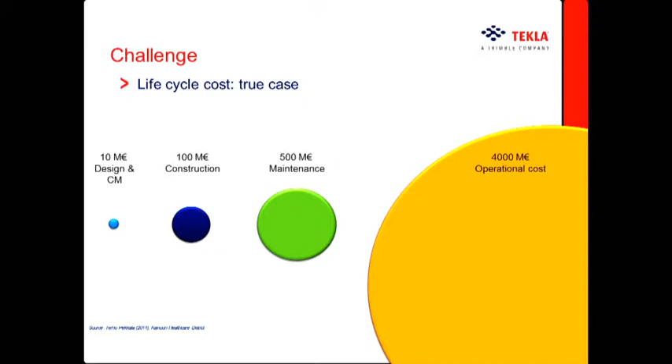And actually in this slide I have a true example from Finland. There was a new hospital project in Finland where 10 million euros was used for design and construction management, 100 million euros for construction, and 4,000 million euros for the operational cost was estimated for a 40-year time period. So maybe the true life is not that radical than the theory was expecting. So that was the product side.

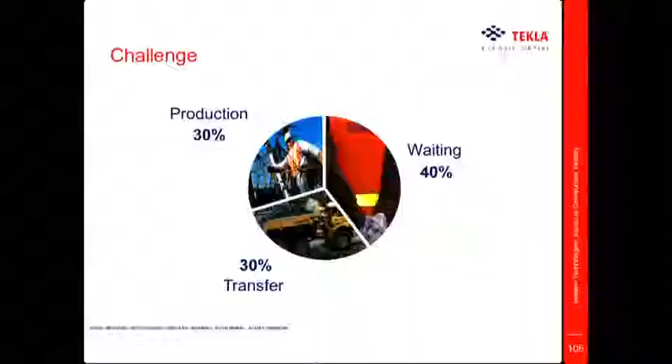Then if we go to the process. Generally, there's a challenge, and there was a research made by the Finnish Research Center and Skanska together, that on the construction side, only 30% of the time is actually used for production. The rest, 70%, is used for waiting or for transfer. Both of those can be called waste.

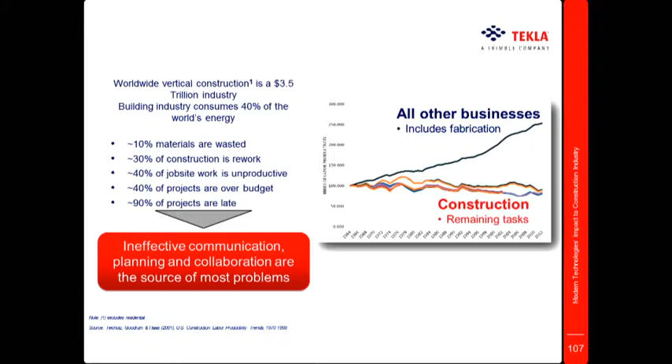Then this graph. In other businesses there has been a significant increase in productivity. This is other businesses, and this is the construction industry. But in the construction industry, as you can see, the productivity level has remained the same, or decreased a little bit. A small note, however: it's not totally true, I would say, because prefabrication that is done off-site is not included in this.

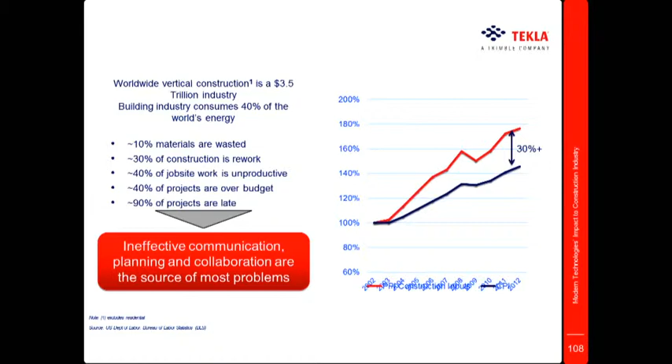But I think this graph is demonstrating the waste a little bit better. The red line is the product price index in the construction industry, and the blue line is the consumer product price. As you can see, there's a 30% difference. And where is the extra 30% coming from? It's ineffective communication, planning, and collaboration that are mostly the source of the problems.

So then about the solutions. BIM is the most potential paradigm at the moment that modern technology can provide. It can be seen as a solution to improve quality both on the product level and on the process level. BIM is an acronym which means Building Information Modeling, Model or Management, depending on the research you are reading.

But then what is BIM? At the moment, BIM is seen as a database that contains essential data and information that is required for construction processes. But I would say that BIM is much more than that.

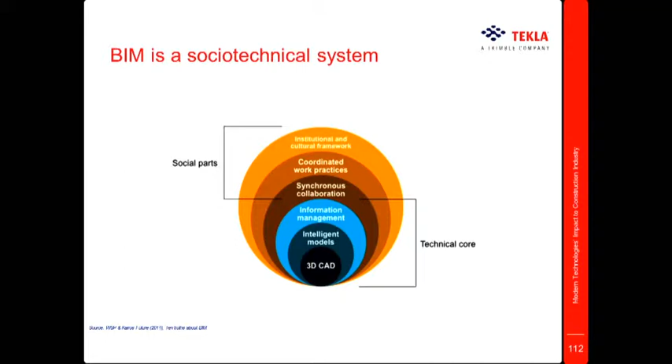So far I have only been presenting the technical core of BIM, which is actually only part of it. BIM is, let's say, a socio-technical system, which also includes the social part. This means that BIM is much more than just the technical core that is usually referenced—it is a combination of man-made technology and the social and institutional consequences of its implementation to society.

In Finland, Finland has been the leading country in implementation of BIM from the beginning. Now we are being challenged by the UK, which has set a target to be the leading BIM country by 2016. The UK strategy includes several things, for example cost savings over 30%, shortened delivery times, reduced emissions by 50%, and a significant increase in exports of 100%.

But although we are the world leaders in BIM, we have only been focused on creating the information, which means digital product models already exist at large scale on the market, but we are not taking any benefit from the information itself. So still, the most common way to communicate is through drawings, and only the design phases are using BIM and its benefits.

So then, how to use the information in the value chain? In the physical model phase, model information is being created at a constructible level. This means it includes, for example, rebars and embeds, and it's usually the engineering offices, engineering bureaus, who are doing that.

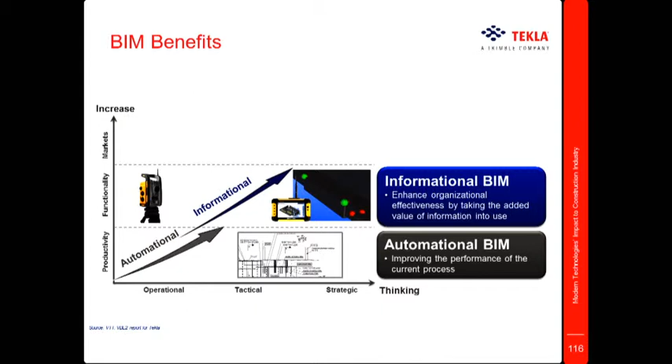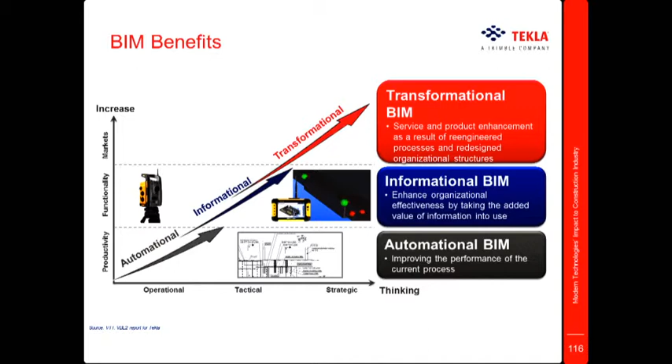For example, in the BIM model you have these kinds of layout points, which you can then use with the total station on the site to confirm that it's in the right place. There are already a few companies in Finland that have created totally new business processes and managed to question the existing processes in the construction industry.

So now for the cases. As a first case, I have Skanska. Skanska Finland has been investing a lot of effort into BIM as a contractor, especially focusing on the process side of quality. They have approximately 70 active BIM projects ongoing.

They use BIM at the site, for example for clash checking for visual examinations, quantity calculations, and so on. In recent years, Skanska has been focusing on mobile devices, with special focus on Tekla Field 3D. At the moment they have over 200 users on these kinds of tablets.

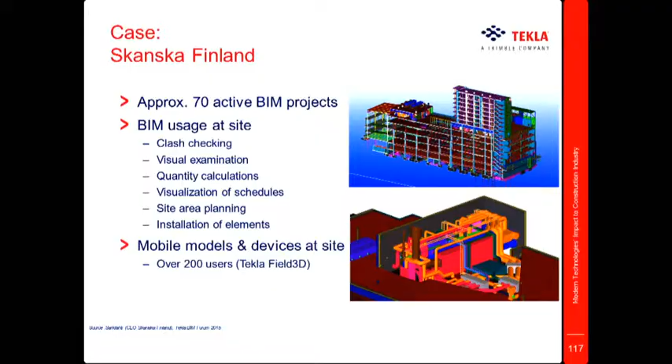Last month we had a BIM forum in Finland, and as a keynote speaker we had Mr. Särkilahti, who is the CEO of Skanska Finland. He mentioned that one of the biggest benefits they have realized is tablets with constructible models. According to Särkilahti, every manager on site using tablets saves at least 4 hours in a week—so that's a lot of savings.

Tablets with constructible models enable job-specific views, as you can see in the picture, and site managers have access to up-to-date information all the time.

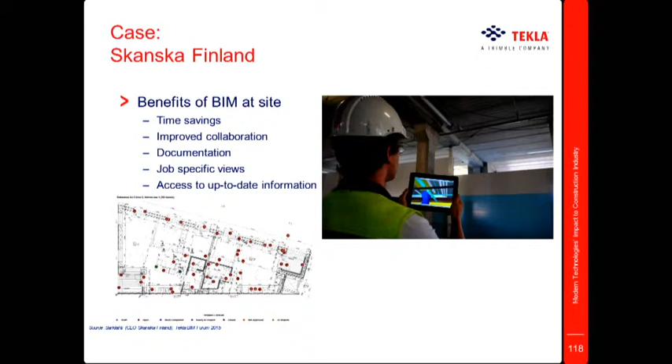According to research and empirical experiments, the majority of people are incapable of comprehending traditional plans. Additionally, 70% of the understandability of plans is lost when it's not on a one-to-one scale.

Because of these two reasons, Sweco has created the Sweco Cave. It's a user-centric functional design review and validation model or system.

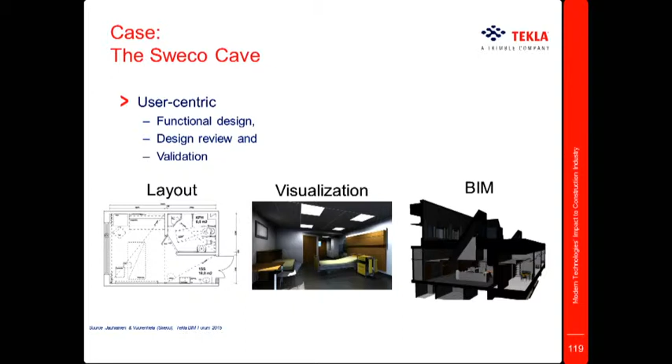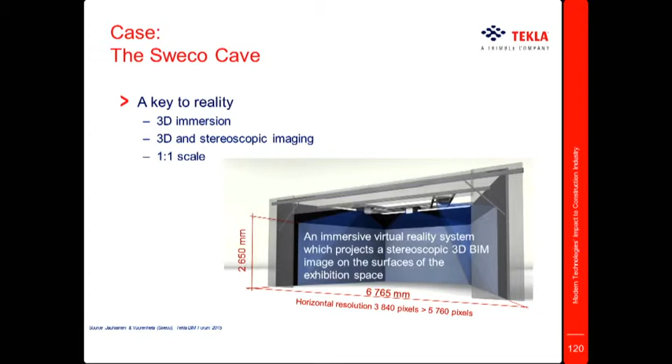The Sweco Cave is a key to reality. The user enters the 3D world with a field of vision exceeding 180 degrees. The 3D vision and stereoscopic imaging gives a spatial sense of space and depth. 1:1 scale gives true life size and increases the understandability of the plans.

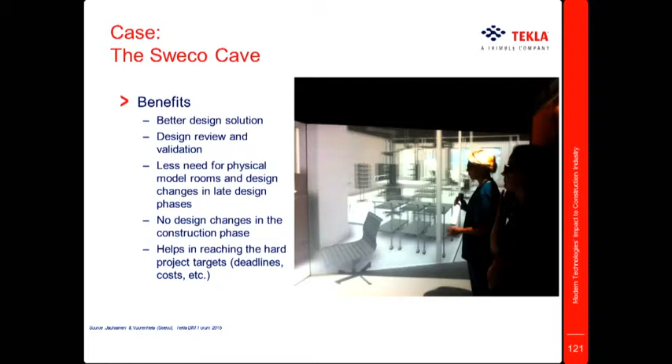Some benefits from the cave that Sweco has realized: better design solutions, a better workplace, more satisfied clients, design review and validation, less need for physical model rooms, and less need for design changes in the late design phase. No design changes in the construction phase anymore. It helps in reaching the hard project targets too.

So then the third case. Hinkley Point is the first of new-built nuclear power plants in the UK that will replace the existing fleet of plants due to decommission. The construction will be a joint venture between Laing O'Rourke and the French company Bouygues. Both are contractors.

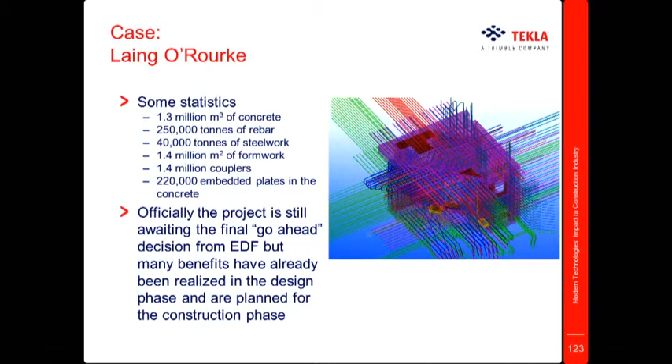The image you see here is around 20 tons of reinforcement modeled to check constructability from a set of already issued-for-construction drawings from a project similar to Hinkley. This small sample had more than 700 interference clashes, which would have amounted to a huge amount of rework on the construction site. By modeling the reinforcement in the design stage, there are huge benefits to reducing construction waste, with waste elimination already happening during the design phase.

Originally, the intention of Laing O'Rourke was to model the reinforcement just to check constructability from the drawings. But during the evaluation process, they quickly realized there was going to be a huge problem on the construction site. It was then decided that the reinforcement needed to be modeled in 3D already at the design stage.

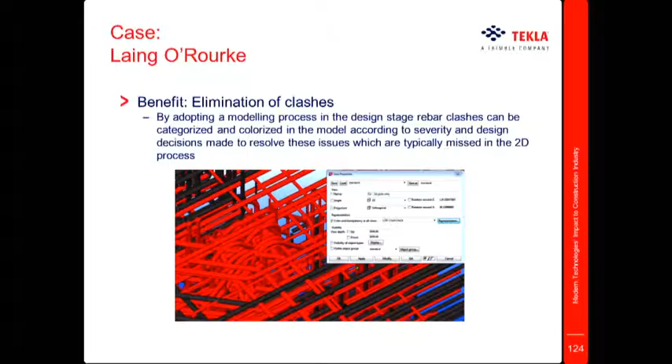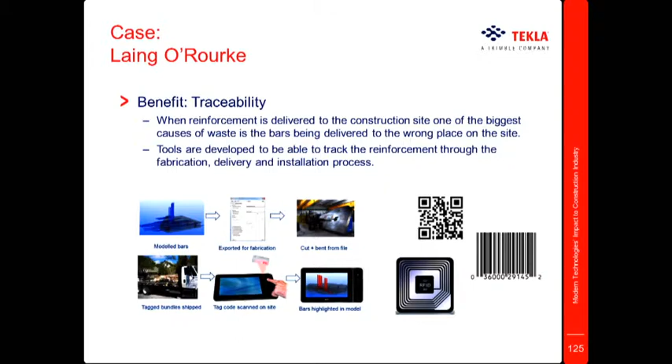Once installed, the installation date and other quality control information can be delivered back to the BIM model.

Laing O'Rourke spent a lot of time with their team thinking about how to move the installation process into 3D, and this has had a significant payback. In some of the trial projects, they reduced installation times significantly.

So, heading for the summary. In the beginning, I introduced the life cycle cost principle. Now I can say there is a way that can help companies, municipalities, and governments save a lot of money by investing in quality in design and construction management.

Modern technology already provides the tools that enable project parties to reach the desired quality in their projects. A small investment in design and construction management phase will definitely help reach better quality processes and save some costs already during construction. But that's only a small saving, since most of the savings come through better quality buildings designed especially for the end user.